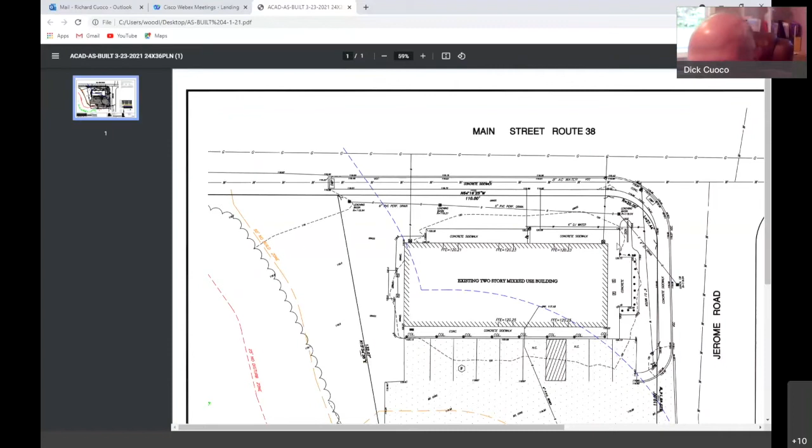So, but I would, if anyone has any questions, I'd be happy to try to answer them. Board members, any questions? No questions. No questions. Stefania, any issues? No, just so you want to continue to a date to be determined outside of the meeting?

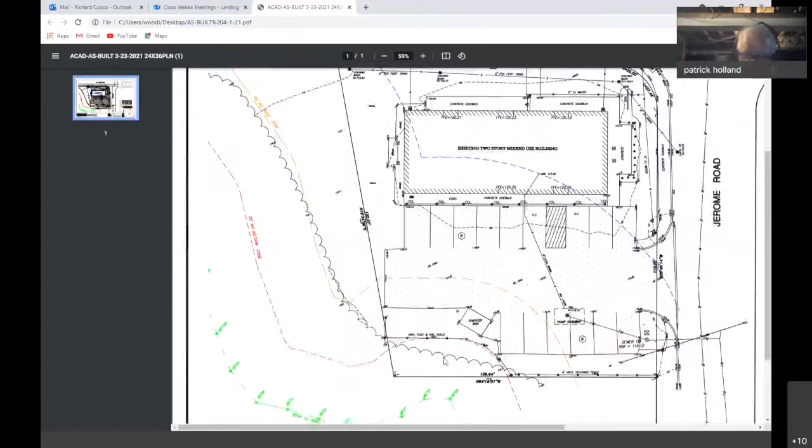Yes. Okay. All right, so I'll entertain a motion for continuance of request of certificate of compliance for James and Joanne Preset, address 725 Main Street, map 34, lot 42, DEP number 305-1051 for a date to be determined. Can I have a motion to that effect? So moved. Have a second. Second.

Missing people on my list is Mr. Walsh, how do you vote? Aye. Mr. Ronan, how do you vote? Aye. And chair votes aye as well. All right, thank you. Thank you, Mr. Chairman.

All right, now we're skipping down to item D. It's a public hearing notice of intent. Kelly Doherty, New England Power Company, M139/N140, transmission line row off 715 Main Street, map 34, lot 33, 43, and 44, DEP number 305-1138. Is there anyone here for that? Yes, this is Paul Martin from BSC Group representing New England Power. Okay. Good evening, everyone.

Do you want me to share a screen and walk you through some of the pertinent information? That would be fine.

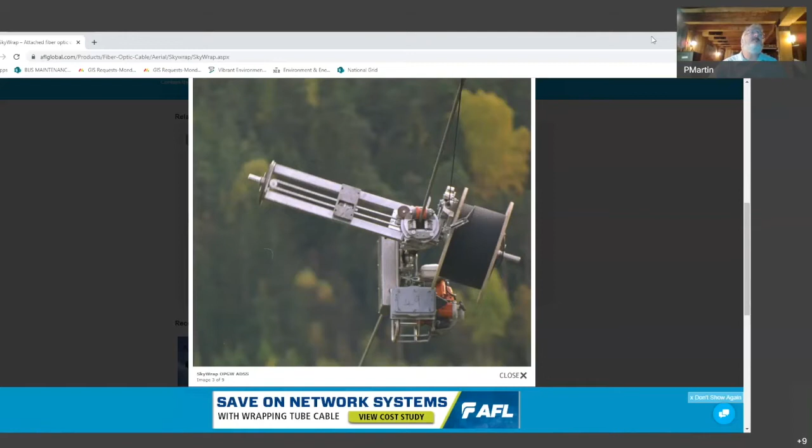So that's 95% of the work as maintenance work. Let me stop sharing that unless you have any questions about the device. So it's basically like a ski lift pulling a wire along with it. Yeah, there's nothing touching the ground other than when they get to the pole, they just flip it over. They disengage it, lift it up 10 feet, put it back on the wire on the other side, and off it goes. Okay, all right.

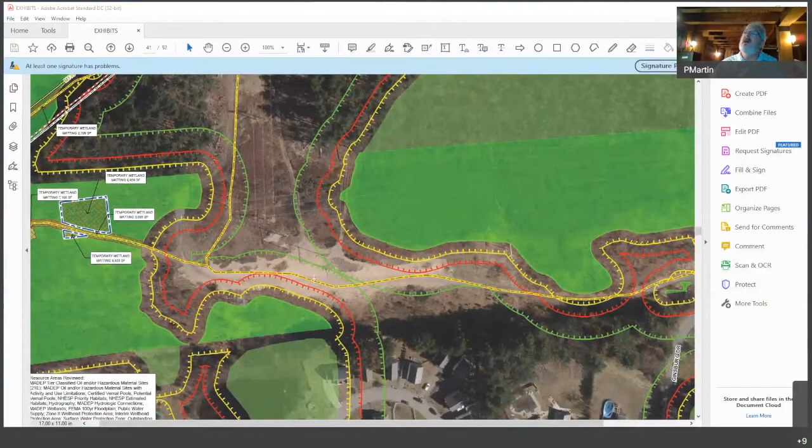So here's the structures 3 and 4, and you can see there's a line running kind of diagonally that crosses over the 140, 139. So in order for the SkyWrap to be installed on the shield wire, these need to be raised and the shield wire added between structures 5 and 5A.

So those are the four, and you can see that structure 3 is not in any resource area other than a little bit of the work pad, which is in buffer zone here. Structure 4 is in BVW along with the work pad.

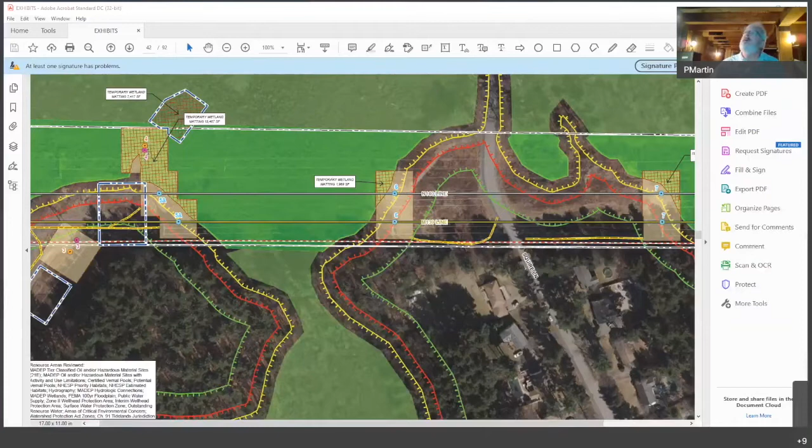Now let me go to the table. Yeah, so here's the table of the structures. So the structures at 141 and 142 are 8-foot diameter caissons and 7-foot diameter caissons, and the structure on structure 4 on the jitney bus is 8-foot diameter.

The reason that these don't fall under the utility maintenance exemption is because they are a substantial enlargement of the foundational area compared to placing a wooden pole with a wooden pole or a steel pole with a steel pole. So that kicks you out of the utility maintenance exemption, and so we had to file for the installation of these caissons.

I don't know if you're familiar with the caissons used on the transmission line, but basically they set an 8-foot diameter corrugated metal pipe that's roughly the length of however deep they need the foundation to be. Then they start augering out the soil from inside the caisson as the caisson, or culvert, is slowly pushed into the ground and ultimately installed to the proper depth.

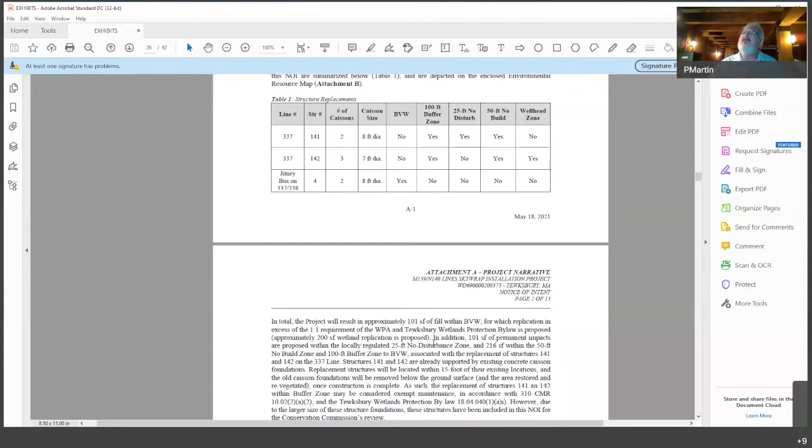So they do represent a small amount of fill in the BVW or the buffer zone, and that's the subject of the filing along with the construction access to get there. Because of this permanent fill, we did develop a mitigation plan that's presented at the end.

So basically we have about 101 square feet of permanent impacts, and within the 25-foot, 216 square feet within the 50-foot and 100-foot. But in the BVW, we only have 101 square feet of fill, which is two towers, two foundations associated with structure 4.

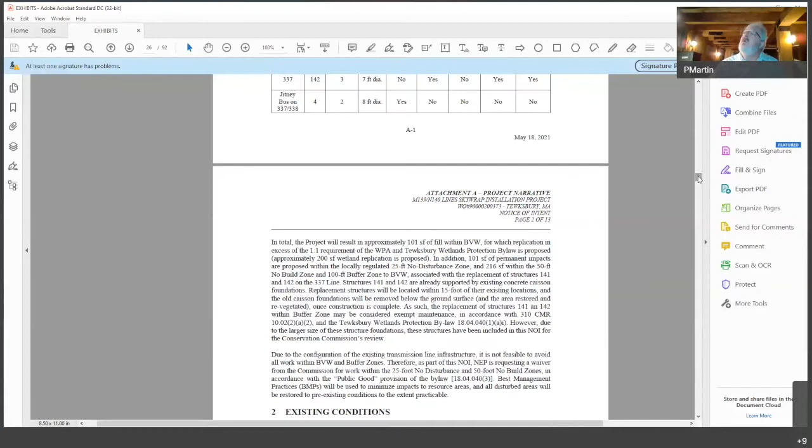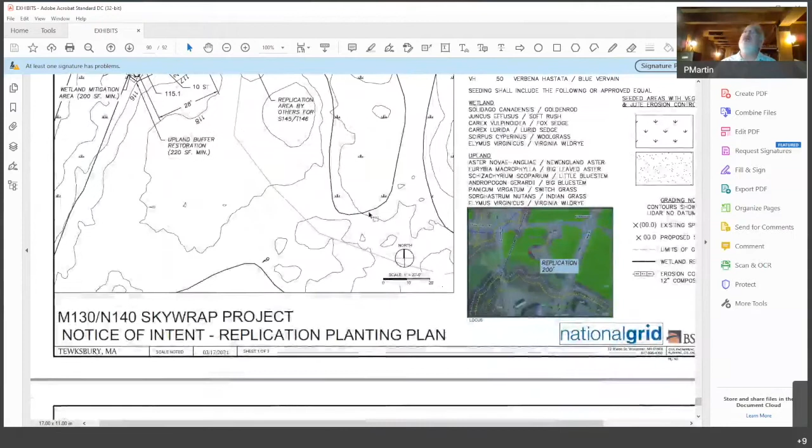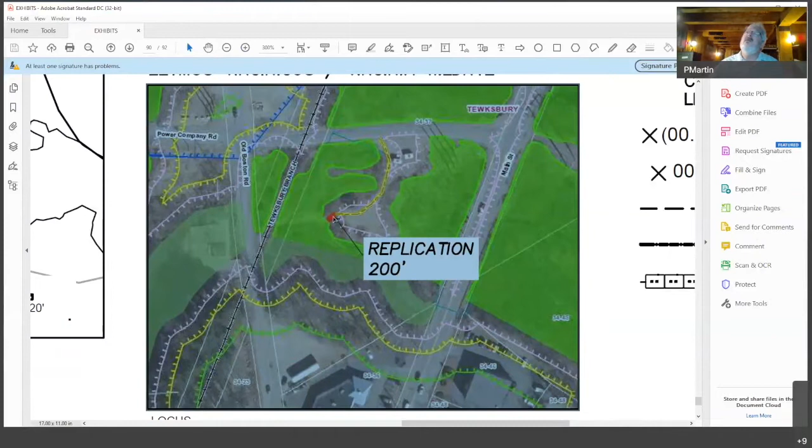So then we'll come back to some of these BMPs. The replication area, let me zoom in a little bit. So Main Street here is Route 38. You're probably all pretty familiar with Power Company Road, and off to the left is a rather large substation. I believe you have another New England Power project in front of you that has a little replication area right here, so we just decided to go adjacent to it, a bit upland next to that BVW.

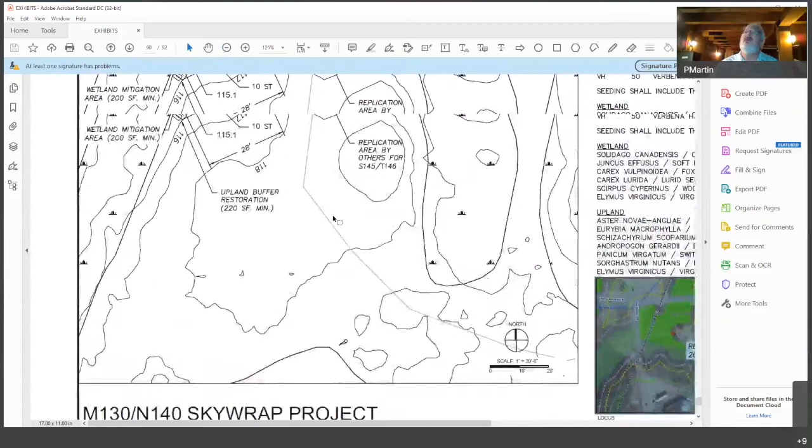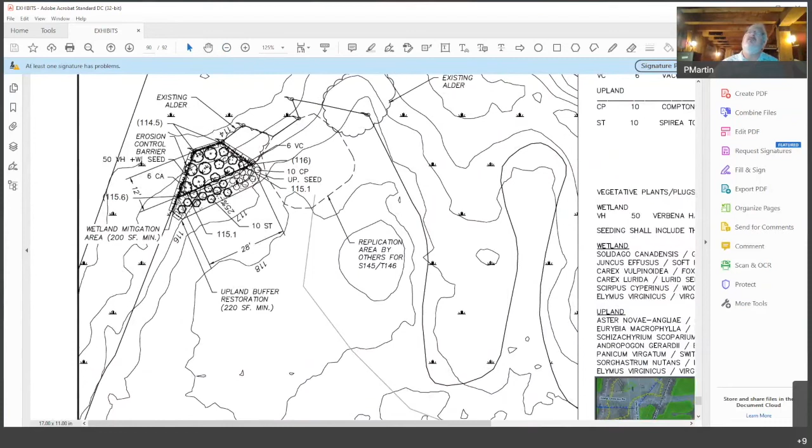And the replication itself looks like this. So this is the other replication area on the S145 T146 project. We just carved out about a 200 square foot area. We'll lower the grade, import organic soils and proper soils, and do the seeding and the plantings.

Which are presented over in this part of the plan. And I think this is a pretty similar list and approach to this mitigation area.

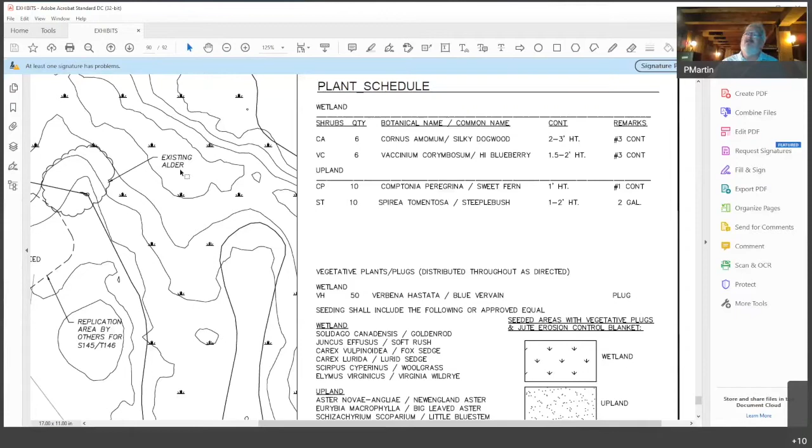And that is pretty much a quick summary of the project. Again, most of the work along the line where the skywrap is going is exempt utility work because it's temporary construction mats, and they aren't replacing any structures along the rest of the line. It's all overhead with that little skywrap machine and bucket trucks accessing each structure, but very little disturbance.

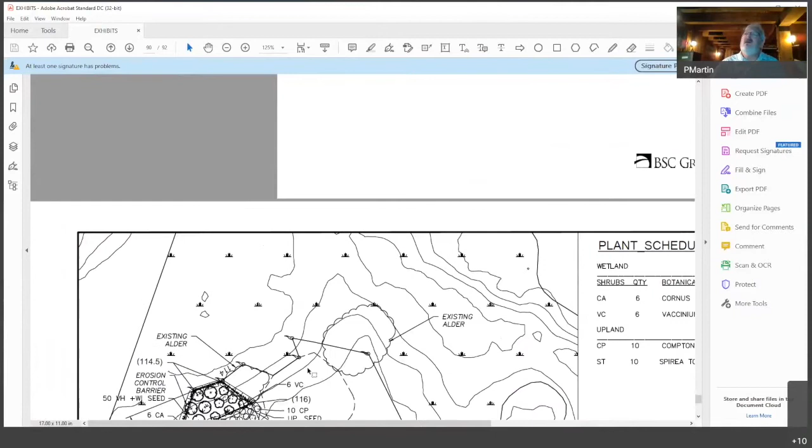And the other thing I will bring up is that at these caisson foundations, we did file an NOI in, I think, August of 2019 for the geotech work. And then we filed a request for certificate of compliance, I think, this past August or September. So you've kind of already seen these foundation structure locations in the filing associated with the geotech borings program.

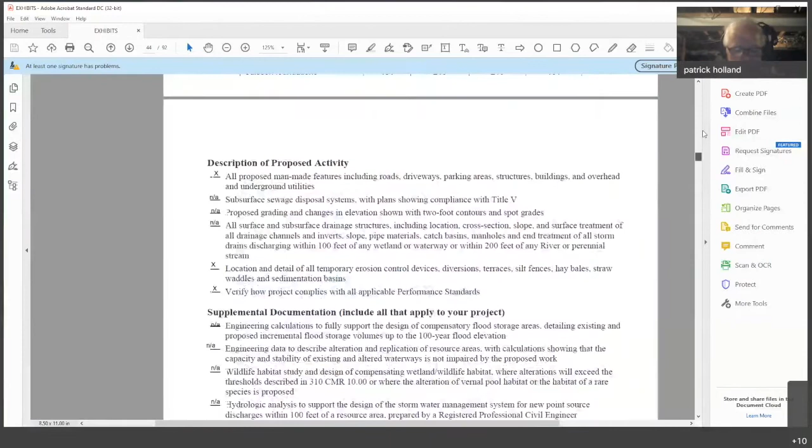Okay, board members, any questions? I have a question. The restoration of the ROW says that the old caisson foundations will be removed to a depth of 18 inches below grade. How much further do they extend down? It depends on the geotech parameters of the soil and the load bearing capacity. And I would say for these size towers, the average is around 14 or 15 feet, I think.

And that's just the same material as the towers, or what are they? No, so they're a big 7-foot or 8-foot diameter corrugated metal pipe, like you would see from a big culvert, inserted into the ground vertically and then filled with concrete. So very similar to the new ones.

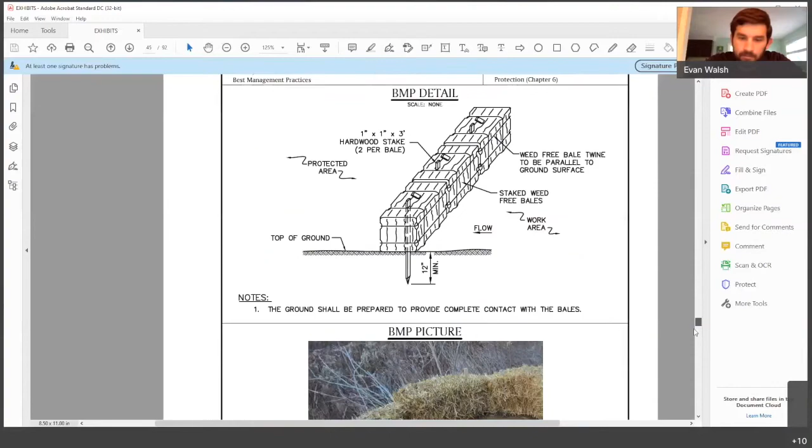Okay, Mr. Walsh, any questions? Yeah, one minor question. Is there any reason why the restoration for this project's not connecting to the restoration for the other project? It seems like there's a slight sliver of non-wetlands when you showed that map. Let me go back there. Like right in here. Yeah, I know it's minor, but it would be better if all the wetlands were connected as one unit.

Yeah, I think we thought that if we mess with this edge, then we kind of mess with a little bit of this edge of this one. And the connectivity, the hydrology occurs from the existing wetland out here. Okay. And we just thought that, I don't know when this one's gonna get constructed or whatever, and I don't know where the existing wetland boundary is. I think it's this darker line.

Yeah, just didn't want to interfere and possibly have to restore or redo something that, when you're digging all this out, affects this restoration area. But we felt the reason we put it so close was that it would basically share the same hydrologic connection and everything.

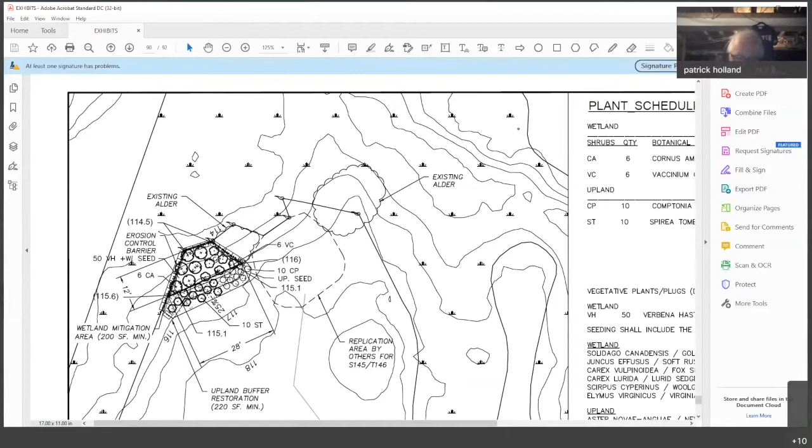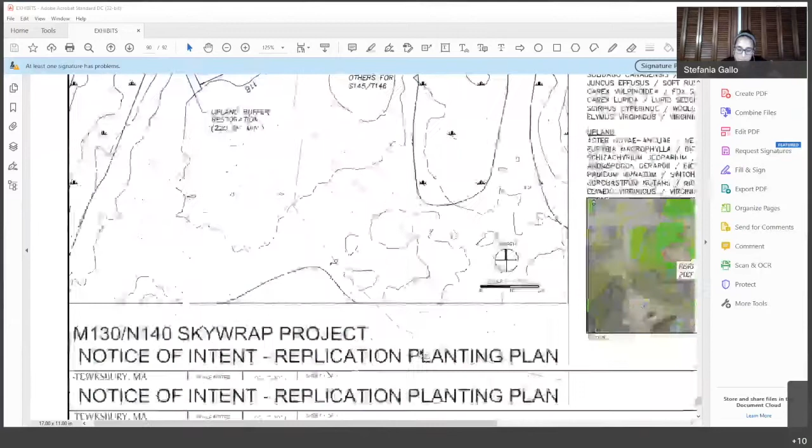Okay, Stefania, any issues? No issues, but I do have a few conditions that I would recommend, pretty much in regards to the replication area. I can read those if you want. All right, go ahead. So there's just two.

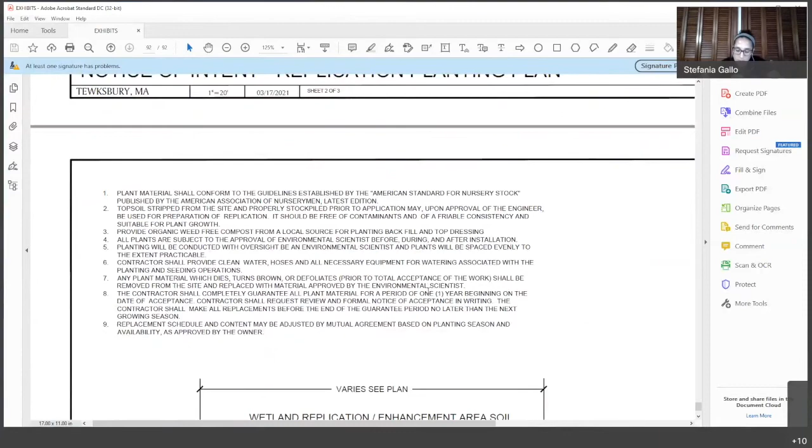The first one is that construction of the wetland replication area must be conducted under the supervision and guidance of a qualified wetland scientist, and any required field changes to the replication area may only occur under the guidance of that wetland scientist. The second condition is that the wetland replication area shall be monitored by the wetland scientist for two full growing seasons and until the area has established at least 75% revegetation with native species. Any invasive species found during regular monitoring will be removed by hand and the vegetative plant material removed from the site. Monitoring reports shall be submitted to the Conservation Commission after each growing season.

Okay, are we okay with that? Yes, those are, as far as New England, standard procedures that we would follow. Okay, I want everybody to remember what she just read because I'm not going to read it again when we go to make a motion or anything.

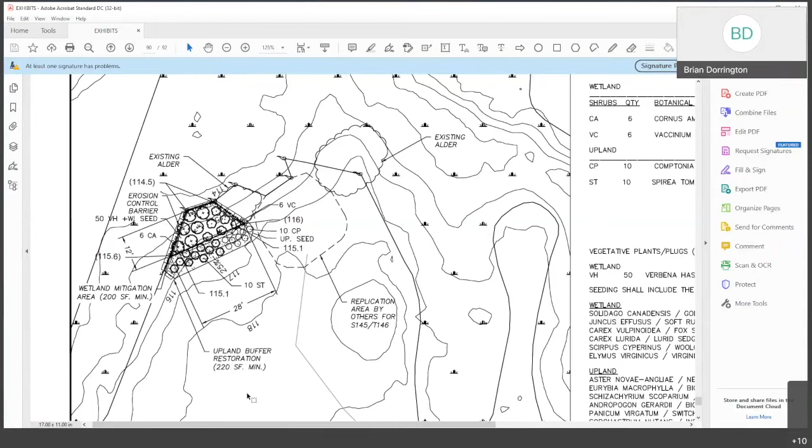So moved. Can I have a second? Second. Mr. Walsh, how do you vote? Aye. Mr. Ronan, how do you vote? Aye. Chair votes aye as well. Okay, in regards to, I'll entertain a motion to approve the notice of intent.

Kelly Doherty, New England Power Company, M130/N140 Transmission Line Row off 715 Main Street, map 34, lot 33, 43, and 44, DEP number 3051138, with the standard order of conditions and the addition of the other two components Stefania just read.

Can I have a motion to that effect? So moved. Have a second. Second. Mr. Walsh, how do you vote? Aye. Mr. Ronan, how do you vote? Aye. And chair votes aye as well. Thank you very much. All right, thank you for your time tonight. Okay, bye. Missing the other two guys, I'm getting all screwed up in my order here.

Okay, what's up next is extension request, Town of Tewksbury, Department of Public Works, Engineering Division, Pinnacle Street, map 91, lot 13, DEP number 3051002. Okay, Stefania, fill us in.

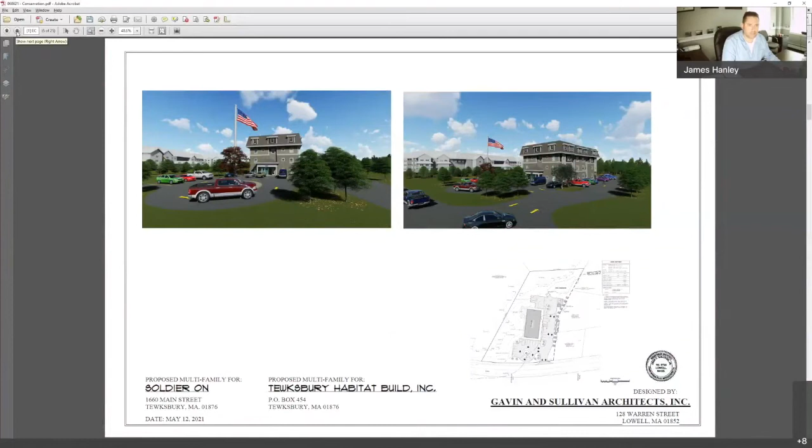Okay, so I trust you can see the PDF, which is basically the cover page of the architectural plans here, just to give you a sense for what this thing is going to look like. Stepping back a little bit, project proponent is Soldier On, which is a nonprofit entity that helps build residential units for homeless veterans. And at the end of this, we'll give you a little bit more detail on who Soldier On is and exactly what they do. But sticking to the application in front of us here, as noted, 1660 Main Street is the location.

We filed the application on the 26th of May last month. I actually took a peek at the DEP website just before the meeting. I did get a file number of 305-1139 just for the record. And really what I want to do tonight is just take about 5 to 10 minutes and walk through the existing site, proposed conditions. We are seeking a couple of waivers, and I think we have reasonable justification for those.

So I'd like to talk a little bit about those. This project has been in the design and permitting process for probably the better part of 9 months. This is the second time in front of your commission. We've gone to planning board, we've gone to the housing subcommittee, we've met with the selectmen, we've done a preliminary IDR. We've tried to take a lot of time to meet with the town to get their thoughts on how this project should move forward. So I'm saying that for the benefit of anybody watching tonight, that although this is our first meeting with you, we spent an enormous amount of time doing the legwork to try to get the comments before they become comments, really.

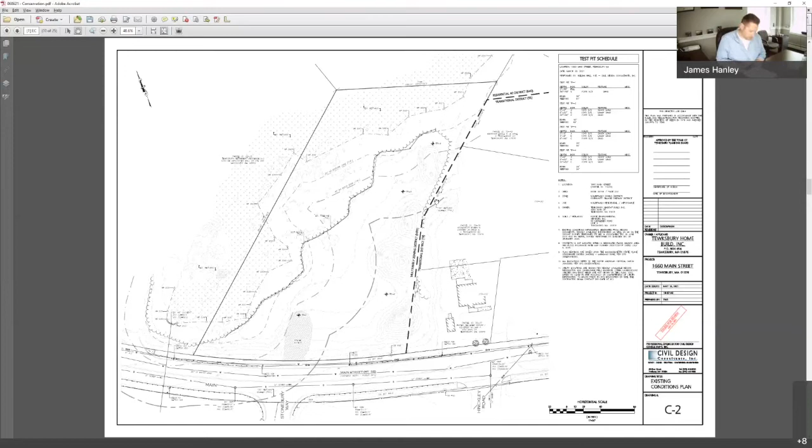One significant benefit to the town that this development is providing is that it's offsetting 210 market rate units, which is a huge improvement. This zoning's underlying requirements call for, I believe, 15% affordable housing. This is 100% affordable housing at this location, and therefore, because it's in excess of 20 or 25%, and they're rental units, they offset 210 units. So from a planning perspective, it's a huge benefit.

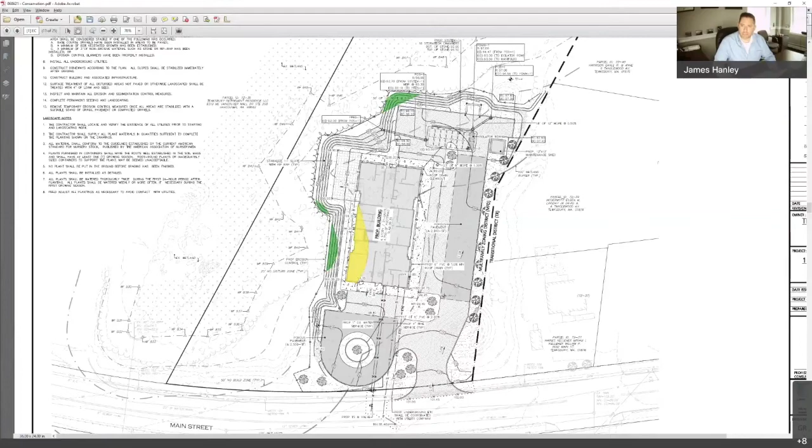Obviously all of this will be ADA accessible. We're providing 19 parking spaces. I believe 24-ish or 20, some number greater than 19, is required to satisfy the underlying zoning. Peter Graham will speak shortly after this—he's done a number of these developments throughout New England, so he knows what the numbers should be, specifically for parking. We're sticking with that, and we're petitioning the planning board for a reduction in parking, which results in less impervious surface, and therefore less drainage and need to capture that additional drainage.

Of the 1.5 acres, approximately 0.8 of an acre will be disturbed for the construction, as shown here. Of that, approximately half an acre is going to be impervious. How are we catching stormwater and complying with the standards?

So around this area, where are we? We are right here. This is one section of porous pavement, approximately 2,500 square feet, and this will capture flow that comes in off of the immediate access drive in the area to the bottom of the building. This portion here as well is another almost 3,000 square foot area of pervious pavement. In addition to that, we have a subsurface system located underneath the parking area that will receive flow from one catch basin, as well as the roof and the roof leaders leading into that.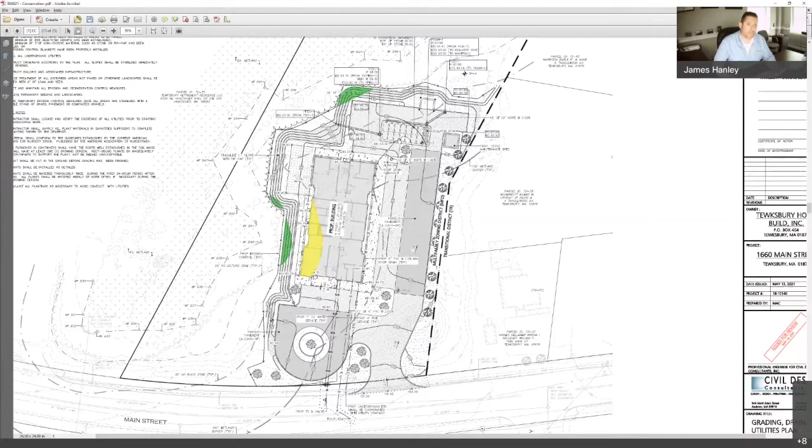So I just kind of colored these up here. We're looking for relief for these three green areas to allow for some disturbance within the 25 foot buffer. These three areas add up to approximately 400 square feet, which is approximately 3% of the 25 foot buffer. I'll get into the justification and alternatives analysis in just a second.

The yellow area here is the portion of the proposed building within your 50 foot buffer. So we're looking for some relief inside of your 25 as well as your 50. We're taking up approximately 620 feet here, which is about 2% of this buffer.

As an alternative analysis, and what we put in the notice of intent narrative, there's basically three alternatives, one of which is a no build, which no one's interested in. We don't want to do that. We want to be able to provide the veterans housing.

Alternative number two really is to wrap significant retaining walls along that 25 foot. We estimated that we need about 300 linear feet of retaining walls that would average a height of about 7 feet. Some would go down to 2 feet, some portions would be 12 feet, but we're just going to take an average and call it 7 feet. Super expensive to try to do that, in the magnitude of $100,000. It's just too expensive to offset the type of development we're trying to do here, and it's certainly not preferable.

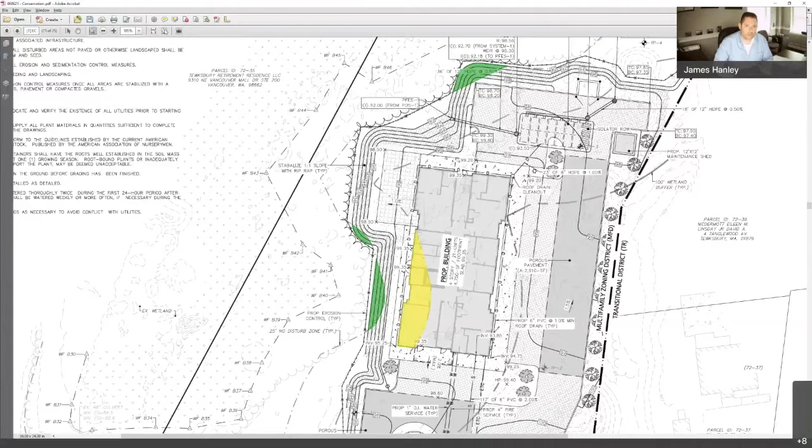So with that being said, that's the existing conditions, the proposed summary, and the waivers that we need, along with our justification. Before I turn it back, Mr. Chairman, I'd just like to introduce Peter Graham, who is with Soldier On, the applicant, who basically is running the show here, and he can give you a little bit of information about what they do and what they've done in the past, if you have time for that.

Okay. Peter, you there? There, now I'm unmuted.

Thank you, Commissioner and Commission members. Yes, thanks for the time. We, as Jim said, are a nonprofit based in Massachusetts. We've been around since 1994, really as a service to veterans organization that has been challenged to find housing opportunities for veterans, and therefore segued into actually building veterans housing, because it was hard to find veterans housing.

We were approached by Tewksbury Home Build after they were working on this parcel with another organization, and things didn't come to fruition. We were in a position, with a great reputation with the state and the Department of Housing and Community Development, to come in and try to make this happen - getting some offset units and leveraging what should be in the neighborhood of $5 million of state funds to develop an asset to help house veterans, both formerly homeless and currently homeless, in the region.

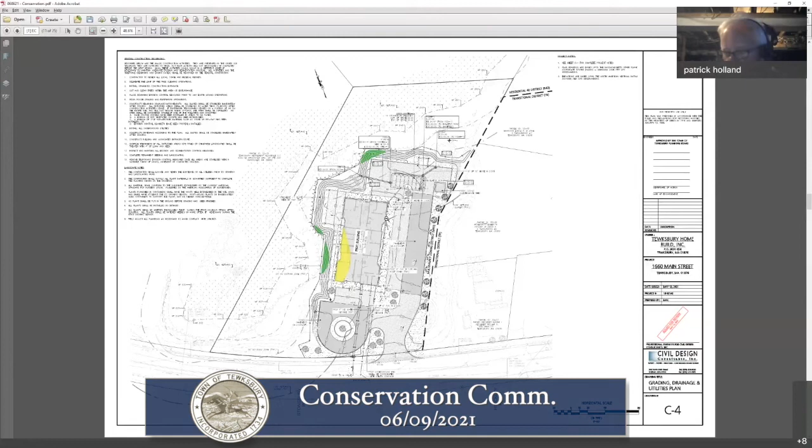Okay, actually I've heard that before, but it never comes to fruition. That was the only question I have, other than one question for Mr. Hanley - you stated that the area in the no build zone was 2% of the lot. Is it 2% of the lot or 2% of the no build zone square footage?

I have it as 2% of the no build zone. Okay, that's what I wanted. Yeah, I think that's what's written in the conservation narrative.

Okay, Stefania, any issues? No, I did issue a letter with my comments. What I would recommend is that the commission make a determination if the project meets the requirement of the waiver being requested - that would be the economic hardship waiver. So that should be a discussion that is had.

Well, we're not going to approve any waivers because the public hearing is still open. Did you get a DEP certificate yet? There is a DEP number that was issued today - no comments yet, but that's typical.

Yeah, okay. So, Jim, just to give you an idea of schedule: we'll go to the planning board Monday night, and set a revised set back out to you as well as planning DPW next week. I believe the planning board meets once in July, around the middle of the month. So we're at least probably realistically a month away before we come back to you with everything buttoned up.

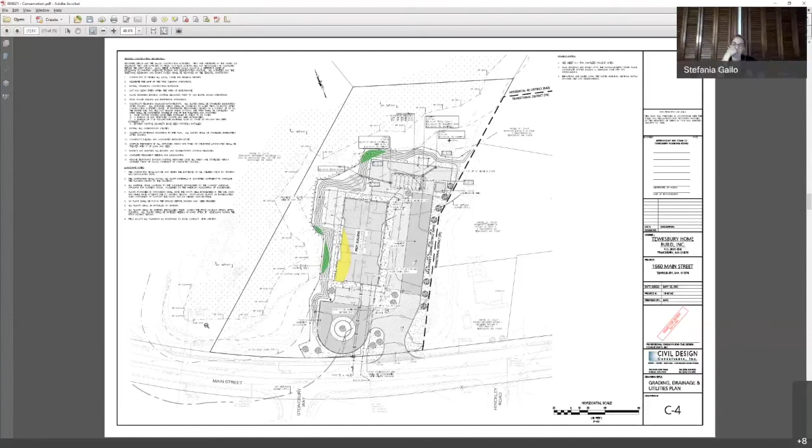Okay, Mr. Chairman, folks - Mr. Chairman, Dick Cuco here. You folks don't meet, you're meeting again, right, in June? We're meeting June 15th, I think it is - I'm not really sure. June 23rd, June 23rd, yeah. And then we go into July. What's the next one in July? I would have to look that up, I can look at it.

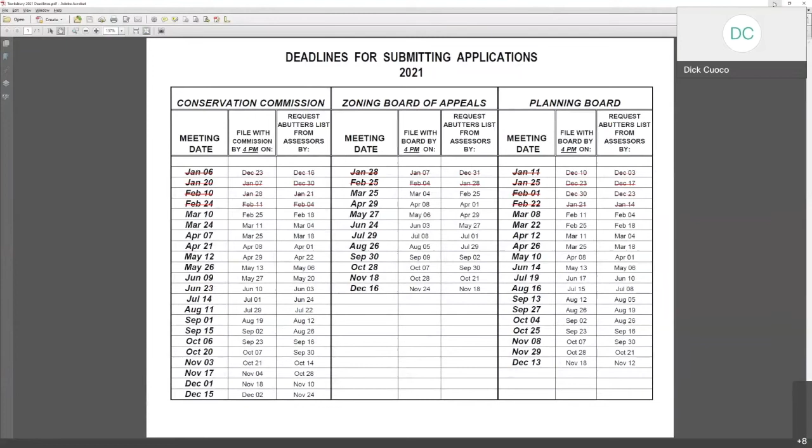Maybe July 14th, Mr. Chairman. Okay, so you guys want to go for July 14th? Jim, I'm thinking we should, if you think there's going to be enough progress that we can talk to the commission about, because we need to get feedback on how they feel on the waiver. Otherwise, when we go to planning board, we'll be kind of showing them something that at least get a straw vote. I think that makes a lot of sense.

So I think for the 23rd, we can be in a position where we have response letters back for Stefania, for DPW, and for planning. And then maybe we could have a conversation about those waivers. And that would allow us to meet with planning in July with a level of comfort.

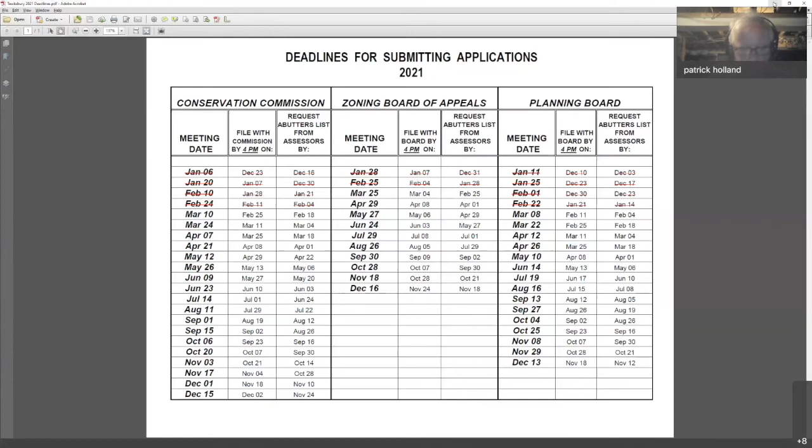All right, and there's no callers, so I'm going to entertain a motion to continue notice of intent, Tewksbury Home Build Incorporated, care of Bruce Penny and Titus, 1660 Main Street, map 73, lot 40, DEP number 305-1139, to our next meeting on July 23rd. Have a motion to that effect? So moved. Have a second? June 23rd, I'm sorry. Can I have a motion to that effect? So moved. Can I have a second? Second. Mr. Ronan, how do you vote? Aye. Mr. Walsh, how do you vote? Aye. The chair votes aye as well. Thank you, gentlemen, thank you very much.

All right, next on the agenda is an enforcement order ratification. Miriam Abdallah, 1022 South Street, map 109, lot 4. Is there anyone here for that?

Is he on mute, or am I on mute? You can hear me, right? Yes, I can hear you. I don't... he's got a little yellow star in the corner there, so.

Okay, while we're waiting for him to come back, why don't you fill us in, Stefania? Okay, so I received a complaint about some tree cutting and some filling on this property. So I went out there to take a look, and it does look like some trees were removed and some fill was brought to the site. So the site is bordered by a stream and surrounded by bordering vegetated wetlands, and the site itself is completely within the floodplain or bordering land subject to flooding. So this work, specifically the fill in the backyard, would definitely have required a permit because it is filling a wetland resource area. Okay, so I did issue an enforcement order. One of the conditions was to put up an erosion control, and that was done and inspected and looks good. And then my other condition was to have someone go out there, delineate the wetlands. It did look like some of maybe the bordering vegetated wetland was filled in a little bit. So my third condition was to delineate that wetland and to determine the extent of the impacts and determine the extent of the floodplain impacts as well. So the commission can ratify this and keep it as is, or if they want to, they can ratify it and then amend it to keep the conditions and add conditions or change the conditions.